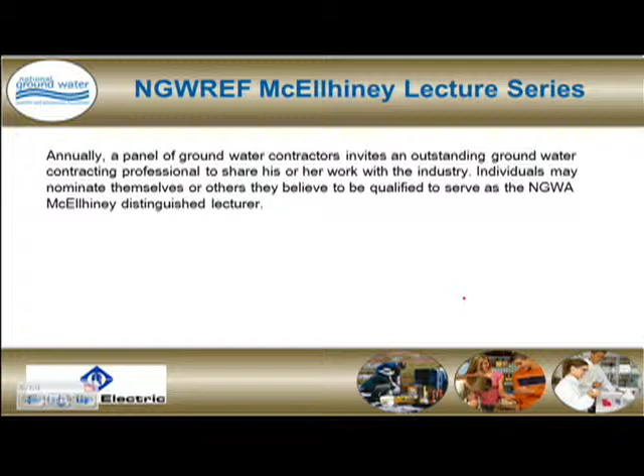I want to tell you a little bit about myself. My name is Tom Christofferson. I am the program manager for water well standards in the state of Nebraska, and since 1999 I've been involved with and an integral part of the Nebraska Grout Task Force Study. I was a water well contractor for over 20 years before I went to work for the state of Nebraska as a field superintendent and an inspector, and now I'm the program manager, so I have a wealth of knowledge about how wells are constructed and how wells are regulated.

Our series today is called the Nebraska Grout Task Force Research, appropriately titled Unexpected Results and New Solutions. This lecture series is about a research project that was different than any research project you've ever known. Most research projects start off with a hypothesis, a budget, and a well-formulated idea of where they want to end up. Well, this research didn't start out that way. This research was developed upon need, and need about new solutions for unexpected results. It's more of a story, so if you stay with me for the next hour and 15 minutes, I'm going to tell you a really neat story about what happened to me in my state.

I want to visit a little bit, for our folks joining us over the web, about Nebraska. You see where Nebraska is located, right in the heartland of the U.S. Some facts about Nebraska: us locals pronounce it Nebraska, not Nebraska, not Nebraska, but Nebraska. It comes from an Oto-Indian term meaning flat water.

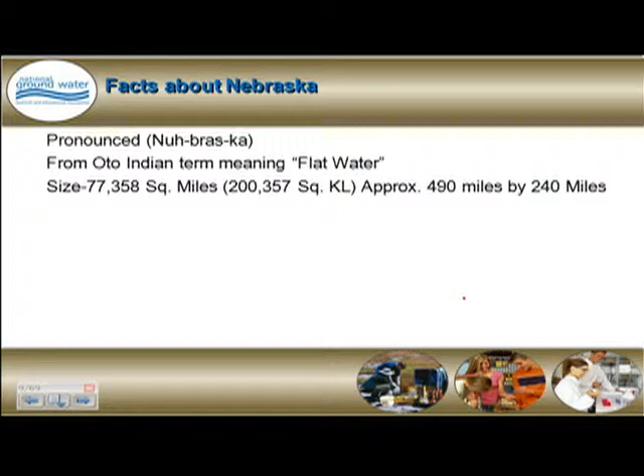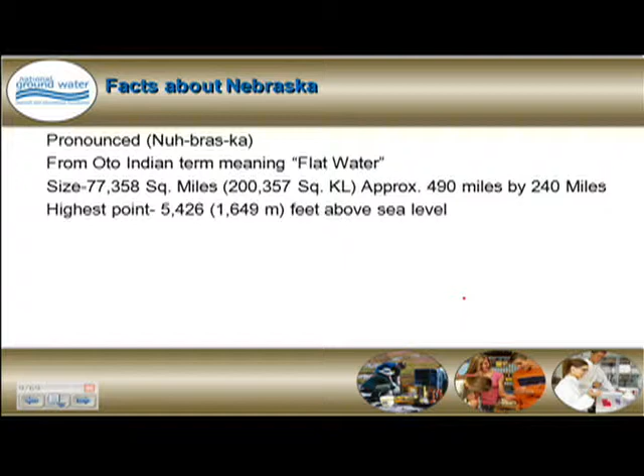Our size, I've been across the country and the world, so excuse me for that. The size of our state is pretty modest: we're 490 miles by 240 miles, about 200,000 square kilometers. Our highest point of elevation is about 5,400 feet above sea level, and our lowest point is 3,200 feet above sea level. So if you take that 2,000 feet of elevation and stretch it over 490 miles, you can see why the Oto Indians called it flat water. There's not much drop there.

Nebraska is known as a groundwater generator. For every gallon that flows into our state, 4 leave our state. That's because we're ideally located right in the middle of what the pioneers called the Great Inland Sea. Most of our deposits are sedimentary, and that allows us to create water, to store water. We are perfectly situated between the Rocky Mountains to the west and the Gulf of Mexico to the south. When the storms come over the mountains, the cold fronts are very dry, and they clash with this warm, moist air mass from the Gulf, and we get tremendous thunderstorms in our state, blizzards in the wintertime. So we get that precipitation in big amounts.

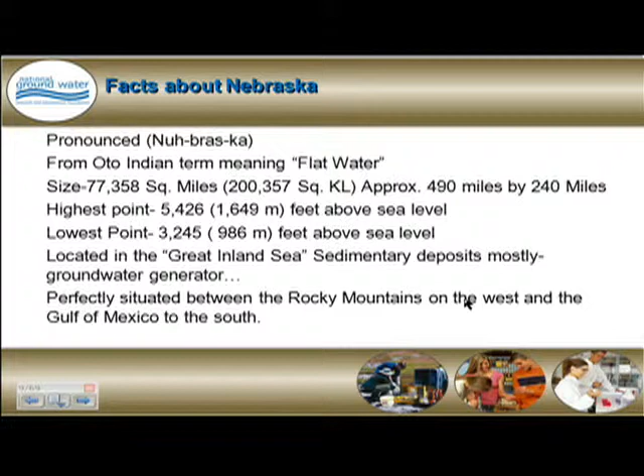Some more facts about Nebraska: we've got about 1.7 million people in our state.

1.2 million of those people rely on groundwater for their daily use. Two-thirds of our population is located in the eastern portion, or eastern quarter, of Nebraska, mostly in two counties: Lancaster and Douglas County.

Our economy is agriculture based. We have industry and manufacturing that supports that agriculture. We average $3.2 billion in income in our state. 40% of that comes from the sale of cattle and calves, 31% comes from growing corn to feed those cattle and calves and producing ethanol and other corn products, 14% comes from growing and selling soybeans, and 4.3% comes from the sale of hogs.

Our greatest natural resource is our groundwater. We don't have the forests, we don't have the mountains, we don't have the beautiful sceneries that I've seen across the country in other states, but we do have more groundwater than a lot of states combined. The USGS estimates that if we could bring our groundwater to the surface, we would have a lake surface larger than Lake Superior, Lake Michigan, and Lake Huron combined. It would be the biggest lake between the Great Lakes and the Great Salt Lake.

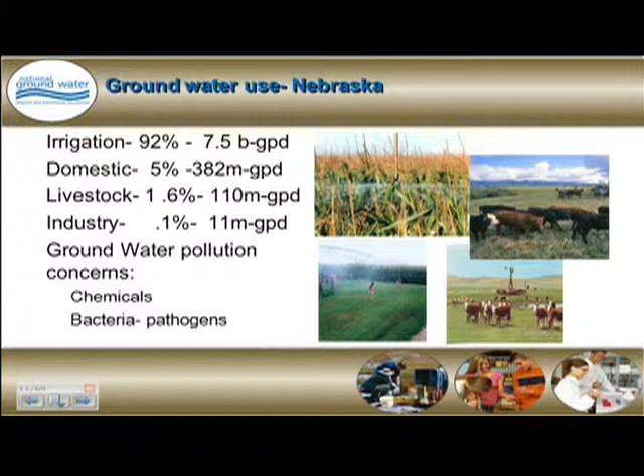Before 1986 in this state, to drill a water well, all you needed was a driver's license and a drill rig. There were no statewide standards, there was no licensing. So our legislature decided, in order to protect this great natural resource of ours, they passed the Water Well Standards and Contractors Licensing Act. The purpose of that act was to protect the groundwater, and another purpose was to promote the efficient usage of that groundwater.

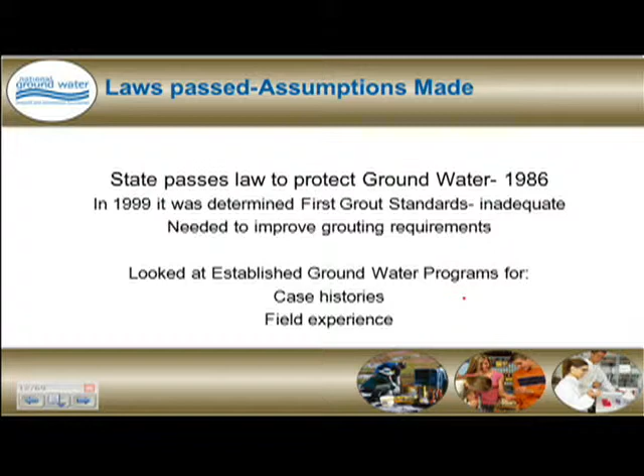In 1999, after we'd had standards for almost 11 years, we determined our first grout standard was pretty inadequate. Our first grout standard was a half a pound of bentonite per gallon of water. It was not sufficient in order to protect our groundwater. So we needed to improve our grouting and improve our requirements.

We looked at other states for case histories and field experience and what they did for protecting their groundwater. And what we found was, they told us, rely on this: full-length grout provides maximum protection of the groundwater. When in doubt, just grout your hole. And all grout materials are pretty much alike. What this did, folks, is it put us in a conventional thinking mode. We kind of locked our brains in a box.

And we took what other people told us for fact. We looked at the prevailing technologies for how grouts were studied prior to 1999, and found out that most of them were studied in laboratories. These were in controlled environments. There were some in situ studies that were done, but they were historically destructive, limited in their depth of view, and segmented.

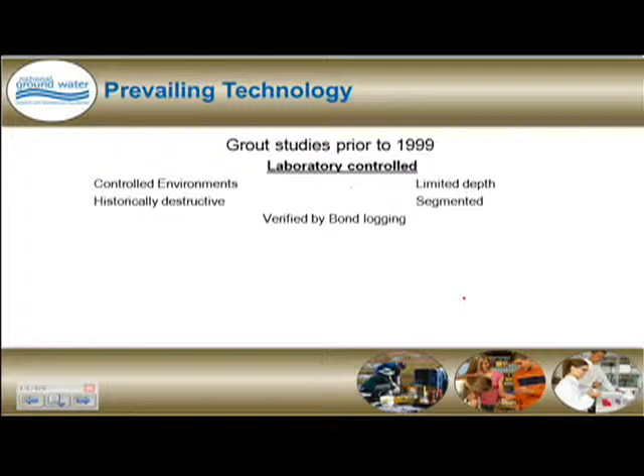What they used to verify their findings in these laboratory studies was a technique called bond logging - that's when they put an acoustic ping in the casing to see if there is any hollow portion behind that casing. If the grout was present, that ping would come back quickly. If the grout was absent, it took a longer time for that echo to come back. So that's how they verified their beliefs that all grout materials are alike, and that full-length grout provides maximum protection of the groundwater.

We were told that the two products we should look at were cement grouts and bentonite grouts. Cement grouts because they provide superior structural stability to the well casing of the borehole, and bentonite grouts because they're more flexible, more pliable, and in the sedimentary deposits, they will rehydrate. So we looked at these.

Cement grouts we found were considered a universal grout. You could use them in all kinds of applications. Water quality didn't affect them, ground quality didn't affect them. Their drawback was they had limited cracking, but it was mostly horizontal cracking, and it bonds to all types of materials. Anybody who's poured a sidewalk or mixed concrete knows that concrete sticks to their shovels, sticks to their wheelbarrows. It's really nasty stuff.

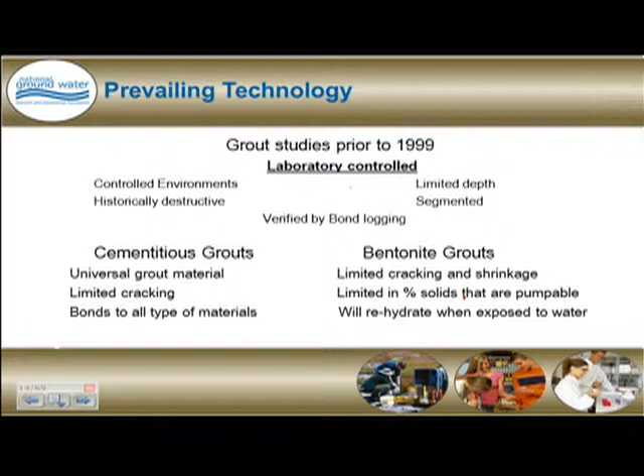The bentonite grouts, we were told, would also crack, but they were limited in that cracking and shrinkage. The big drawback was you could only pump about 20-25% active solids in a bentonite grout. But the redeeming factor was bentonites rehydrate when they get wet. That's what they do - they swell up and repair themselves.

Based on this conventional thinking, the state revised the standard in 1999, and we adopted the national belief. We took as the bentonite grout standard a 20% active solids bentonite. It had a permeability standard of 1 × 10⁻⁷ centimeters per second, and we felt pretty good about this. We now joined the rest of the country in providing groundwater protection.

Shortly after that, the bentonite industries came to us and said, we've put a lot of money and research into a grout product that's less than 20% solids. It has the same characteristics as a 20% solids product - same gel strength, same permeability standard - and now they can't use it in Nebraska.

So, with the bentonite industry's cooperation, the state of Nebraska decided to construct the ultimate well. This was going to be the way everybody should make wells. For the first time, we held a demonstration at the University of Nebraska. What you're seeing on the screen is the first time anywhere a water well has been filmed from the inside out during its construction.

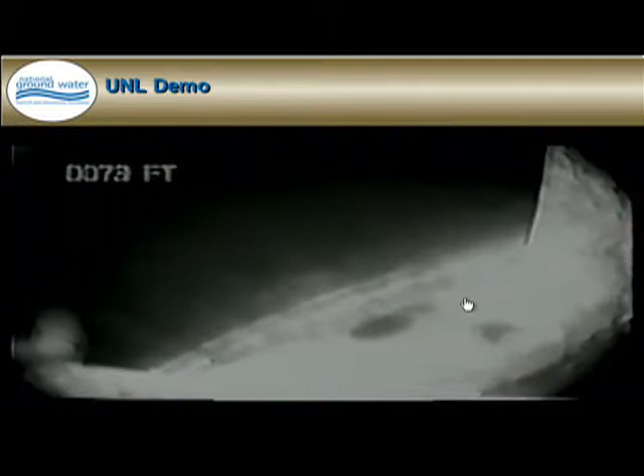They're a free fall chip. We poured them in a real deliberate fashion, and what we really wanted to see was how these chips form a seal, because this is a product we use a lot in Nebraska and have used a lot since 1986. We wanted to see if the chips would align themselves, if they would make a good seal, if they would bridge, if they would impact the gravel pack. As you can see, the chips kind of find their own place in the borehole. They align themselves in a real nice, orderly fashion, and they make a good, tight, homogeneous, uniform seal. We were really happy about this.

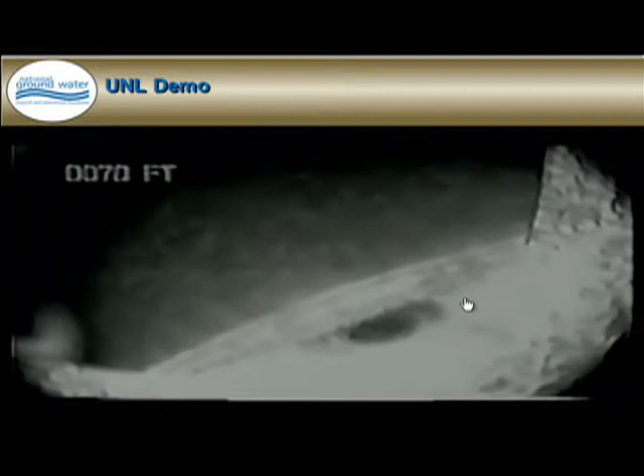This was really encouraging. So now we decided to start pumping our grout slurry. You can see our grout slurry coming up in a very quick manner, just like you want bentonite grouts to do. They come up the borehole in a rapid fashion, evacuating everything liquid out in front of them. You can see the grout itself has a nice kind of pudding consistency. It's looking really good - in fact, it came up the borehole so fast, it outpaced our camera.

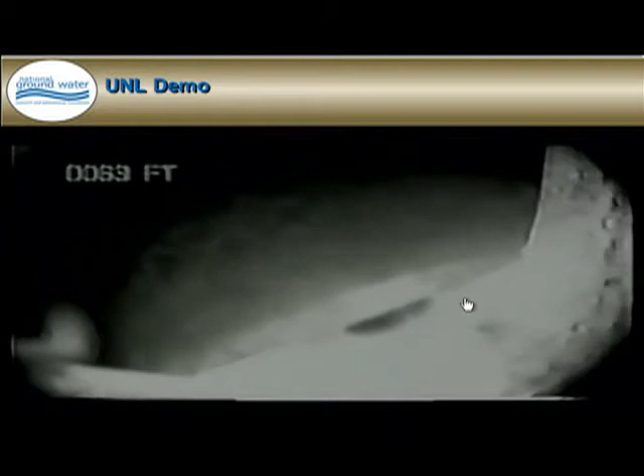Once we caught up with the top of the column, we watched how the grout migrated up the borehole. When the grout would meet an obstruction - say a piece of bentonite stuck to the side of the borehole wall, or some cuttings that didn't quite get cleaned out - the grout, instead of evacuating it, would just entomb it. It would surround it and place it, kind of making it part of the grout column.

This was the ultimate well, folks. This was how we make monitoring wells in Nebraska - full-length grout to provide maximum protection to the groundwater. We were very excited about this. Wow, look what we did.

Until we went back 14 months later to follow up on this. Most of that grout column was missing. It's gone. And this is how you get started in research.

The sun revolves around the Earth. That was a tough one to get people not to believe. The world is flat, Columbus, you go over there, you're going to fall off. And if man was meant to fly, God would have given him wings. I tell you what, if that would not have been true, I'd have had a lot of train miles and shoe leather worn out this year. Because I'm really glad folks would challenge the conventional thinking.

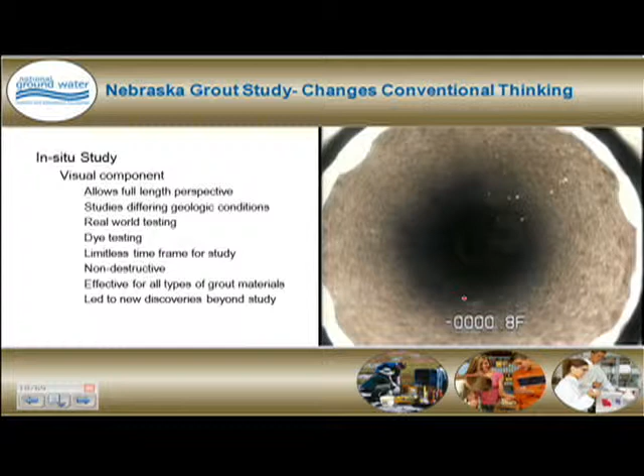But we can use it for all types of grout materials, and we can put it in all kinds of geologic sites, and it's effective for all kinds of grout materials. In fact, some of the findings out of this led to new discoveries beyond this study, and we'll talk a little bit more about that later on.

Early on, it was felt that our study needed a mission statement. The mission statement to keep us focused was that we are going to look at the products used for grouting wells, not the people who make the products. We're not comparing manufacturers, we're comparing bentonites, certain grades of bentonites, certain degrees of cements, and we want to study the properties and how these react.

Because of that, we got great cooperation from the industry. The bentonite industries and cement industries gave us all the information and the support we needed.

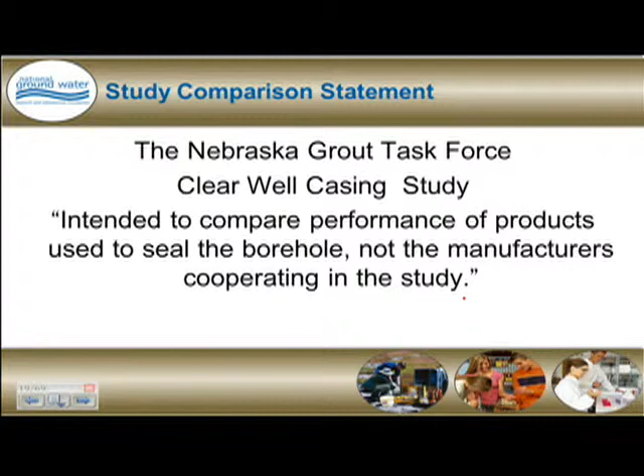One thing we learned: when we made our ultimate well at UNL, we didn't do any background testing because it wasn't research, it was a demonstration of the ultimate well. So when things went bad, we found out that we didn't do anything for testing the groundwater. Were there contaminants? Were there conditions that would affect grouts? We didn't know.

So when we chose our study sites in our state, our university went out and took core samples of the soils. We studied those for particle size, moisture content, and any contaminants that would degrade a grout. We also studied the water quality for those contaminants and those parameters.

Then when we were done with that boring, we put a monitoring well in that site, and we would monitor the fluctuations of the static water table. What increases or decreases in water table affect our grouts? This is what we're going to find out.

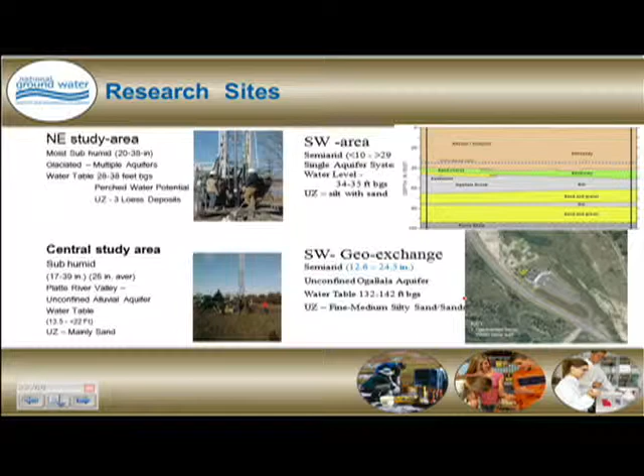They were held to that because of the cost of the casing. The casing was about $10 to $11 per foot, so we had expenses we had to stay in tact with. The fourth feature of the southwest area is where we got into looking at grouts for our geosystems.

This is at Lake McConaughy, the visitor center. This unique situation gave us a very deep water table. We had an extended vadose zone, so we could see how our grout stands up to this dry environment without much water. To give you an example, this is how monitoring wells are constructed in Nebraska.

One thing we learned in the university study is when we wanted to find out how badly the grout was cracked, we tried to pour dye down the hole, but the dye went everywhere. So our task force came up with a containment vessel that we designed about a 4-foot deep flush buried cover.

In the bottom of that cover we poured about a foot of gravel, and our dye tube terminated in that gravel. So when we dye tested this, the dye would load the gravel and put an equalized pressure on top of the grout column, so we would get a uniform standard for validating our grouts.

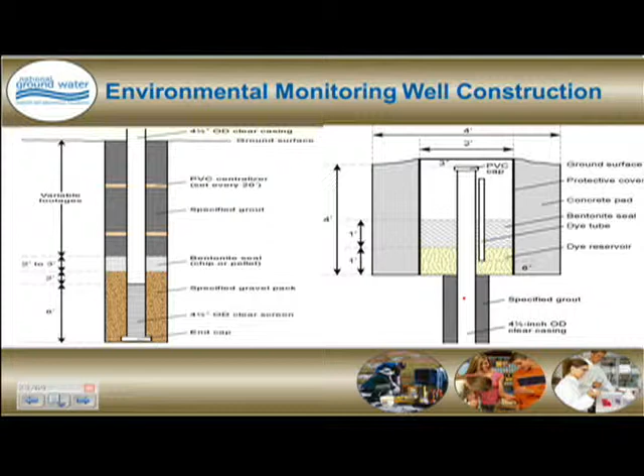The goal of this visual study was to be a very objective analysis, so we went foot by foot of the borehole. Our camera surveys were performed 24 hours after the grout was placed, so we got a new picture. We came back 30 days later, 60 days later, 90 days later, so we got a nice time-lapse photography on how all this grout ages.

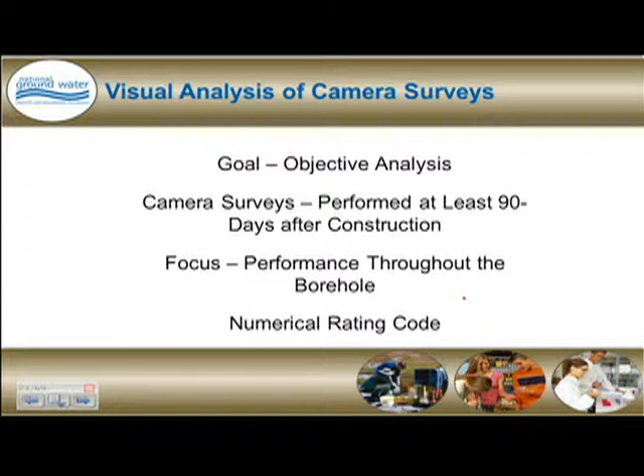If you have a 1, that means your grout was very good — it looked just like it was pumped the day it was made. If it was given a 2, we saw some cracks, some developments happening in the grout, but we still felt pretty good about its ability to perform. If you saw a 3, that meant the grout was no longer considered a grout — it had channels, voids, detachments.

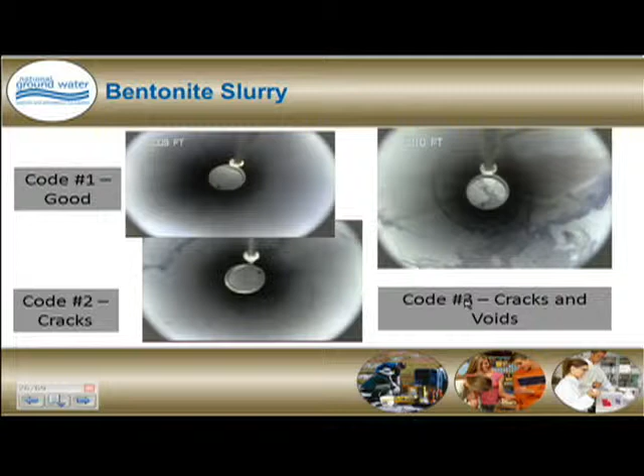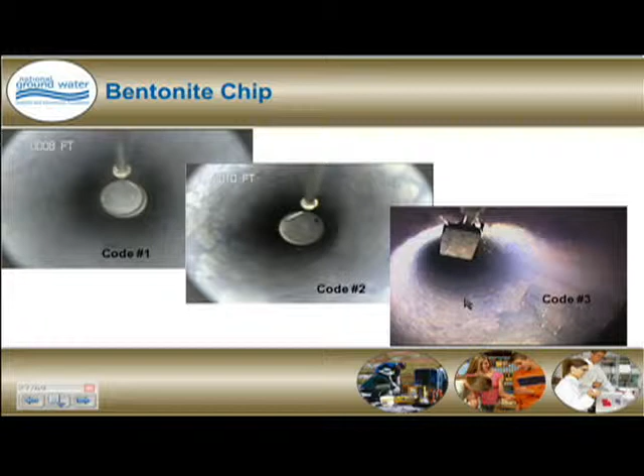Now, our next challenge, when we went to study the geo-exchange system for closed loops, nobody makes closed loop piping that's clear, and it's never big enough to put a camera in. So in order to study the grout, we had to insert a clear sight glass right in the middle of our loops. This did two things: it allowed us to look at the grout full length, and it also allowed us to look at a grout in a larger than normal situation of a borehole. We had to drill almost a 10.5 inch borehole for 3/4 inch loops, and nobody does that in the real world. So we're looking at an overgrouting situation and how that would affect our grouts.

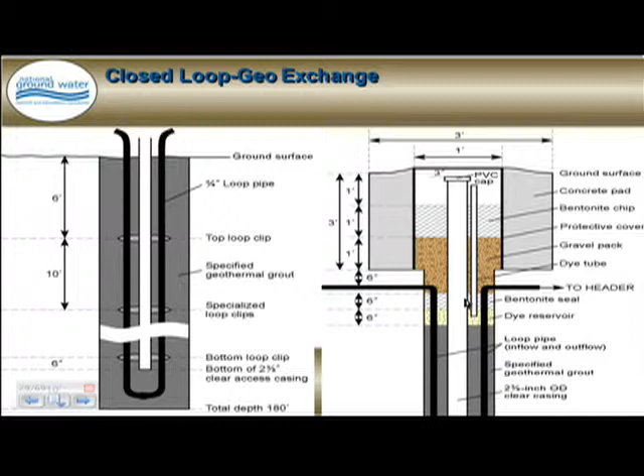When we did, our contractors told us that our loops are no longer working, and it's because that grout is insulating the loops. Well, getting caught in the conventional thinking, everybody was pretty sure that's what was happening until we came up with this picture. It's not the grout that insulated the loops, it's the lack of grout that insulated the loops.

And we found a family of bugs living in it. My good friend Ron Peterson from the bentonite industry looked at this and said, this is conclusive evidence that bentonite is not harmful to wildlife. So he's trying to make a good point, trying to put a good spin on a bad situation, but really, if there's bugs living in your borehole 104 feet below ground, you have no chance of providing groundwater protection with that kind of grout material.

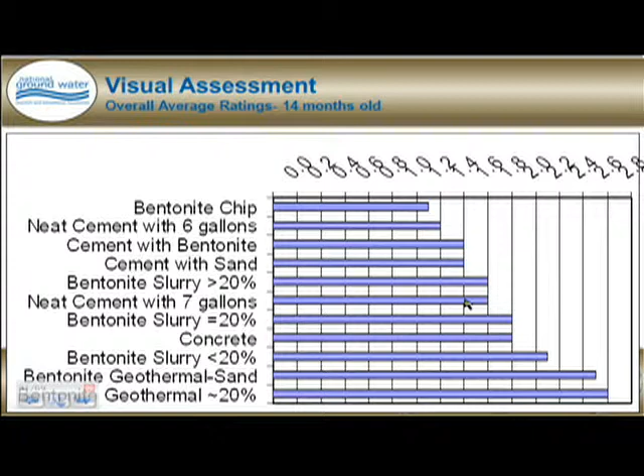So we are seeing some things here. We're eliminating some things. We're coming to some preliminary conclusions, but we need to validate it. Because ours is a visual study and bond logging is not going to work to validate our process, we chose the dye testing. The dye will show you where your cracks in your grout lead.

We asked the state of Ohio, who's been doing dye testing for 20 years or so, what to use, and they said use a green colored dye. Green is not a natural color for groundwater - if you've got green in the groundwater, it's pretty bad. There are other dyes that are oranges and browns and reds, and they could be confused with iron deposits. So we chose a fluorescent green dye.

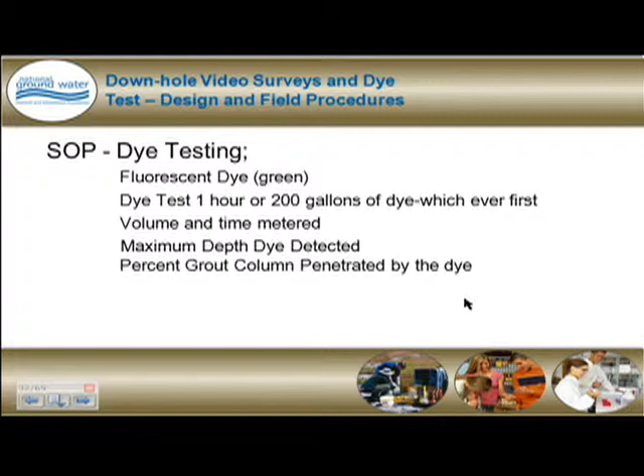Our procedure was to dye test these wells for an hour or until our dye tank ran dry. We had 200 gallons of dye mixed up, whichever came first. We would meter the volume used and the time it took for that dye tank to run out. That allowed us to calculate the proposed maximum depth the dye could be detected - how far it would really travel in a certain period of time, and how much percentage of the grout column would be penetrated by that dye.

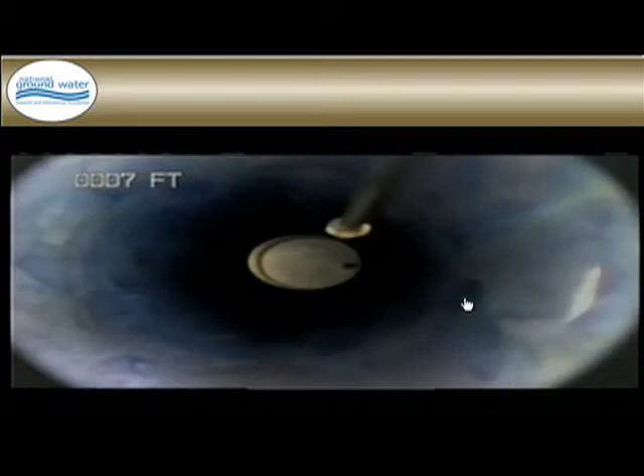This is how we construct monitoring wells for cleaning up groundwater at the time. This was maximum grouting, providing maximum protection, full-length grout.

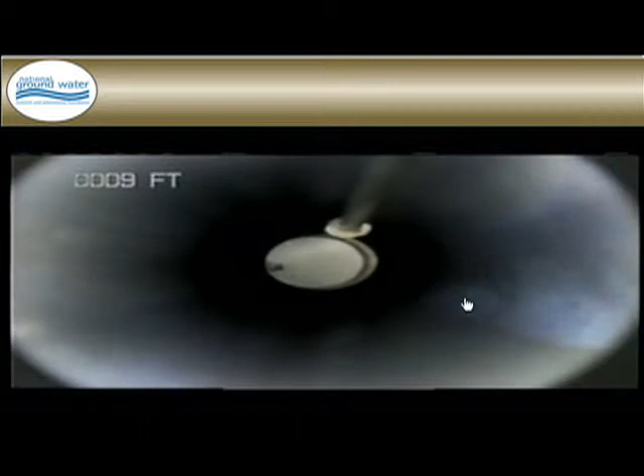Well, we watched this to about 9 feet, and we got pretty shocked, but now we're starting to see some ponding coming up in the borehole. And we're feeling, hey, maybe our grout column is intact at the bottom. We kept watching, but what happened was that wasn't ponding - the dye ran so fast it took the gravel out of the flush mount and took it down the borehole and bridged.

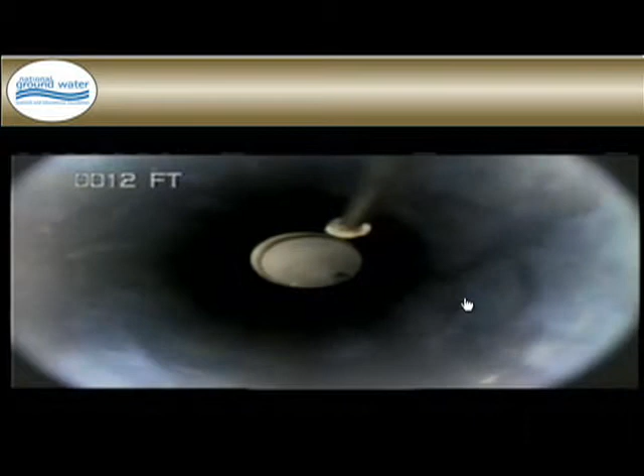That's how big the cracks were in this 20% grout. So we kept watching, hoping, and it kept looking pretty dim until we get down here pretty close to the static water table, and we do actually see ponding take effect. We do see some good news, folks. Why do I say that? Because if we don't see ponding, we know that the grout column is shot clear to the aquifer.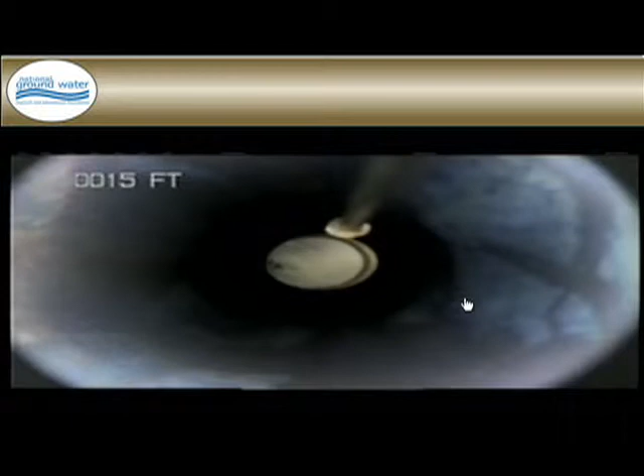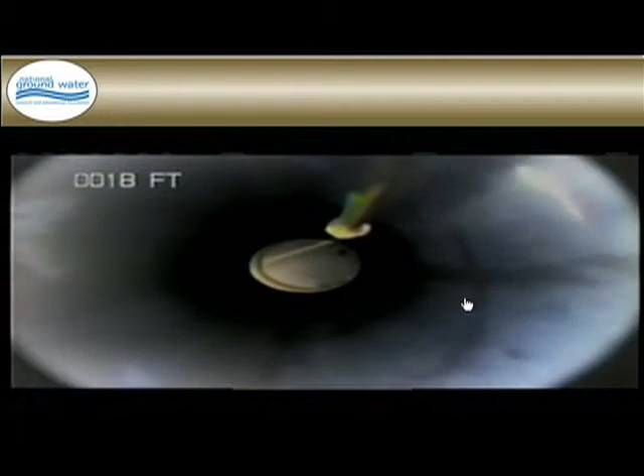This dye would have gone out in the aquifer. We would have never got any trace of it back. But when you see ponding taking effect, you know something's happening in the bottom that's holding that column from getting to our production zone. And if you watch the screen on the left-hand side, you'll start to see the borehole fill. So this gives us another clue - not the entire length of the borehole is damaged.

Here's another unexpected result. The screen on the left is a snapshot from that video. We get to 18 feet and see this nicely illustrated crack. Look at that green dye - that's pretty easy to see right there.

So we took a picture. We came back a week later - there's that green dye in that crack. Came back a month later - same green dye, same crack. We came back 3 months later - same green dye, same crack. This is where we learned that bentonite slurries will not rehydrate. Once they're cracked, they're cracked. They're not coming back.

Now that's different from what we were told. We were told bentonites have this absorbent quality - they get wet, they want to rehydrate and reswell. It's undetermined why this happens. It may be because in order to mix a grout slurry you have to have shearing action to drive the water into the particle. Then maybe there are retardants built into the grout that keep it from flashing in the grouter. But for whatever reason, if a bentonite slurry cracks, it cracks and is not coming back.

A new unexpected result.

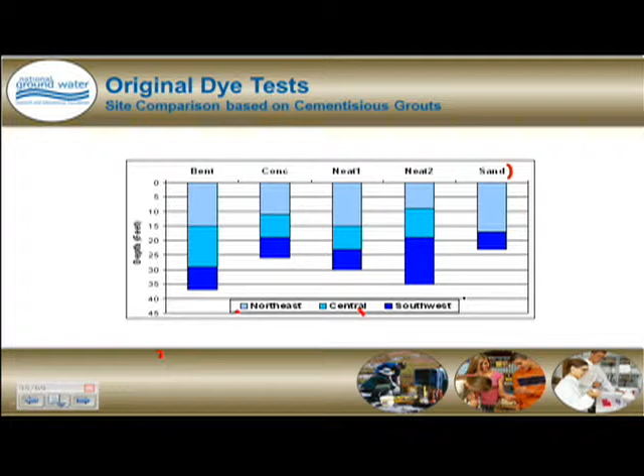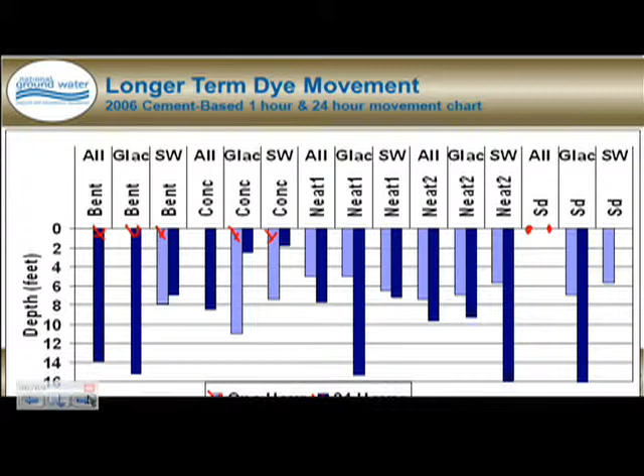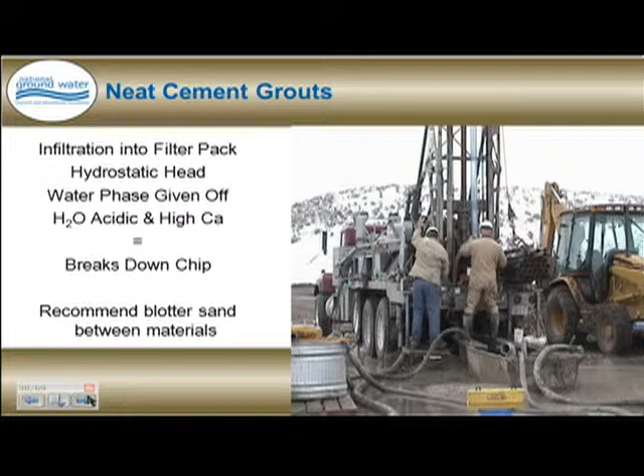Our third unexpected result is we found out that neat cements will blow right through a bentonite chip seal. This is another way we make monitoring wells. If you put a chip seal down like we saw in the video, right above your gravel pack, and then your grout column is neat cement, this neat cement has enough weight and enough characteristics that it divides the bentonite chips and gets right down into the production zone. To illustrate that, here's another video.

Now in the middle of your screen, you see the white chips as they were placed. These chips were given about 45 minutes to an hour to hydrate before we put any grout column on top of them. Now 45 minutes to an hour is probably not enough time to fully hydrate a chip, but there are conditions in Nebraska where you can't leave the borehole open much longer than that or it becomes unstable.

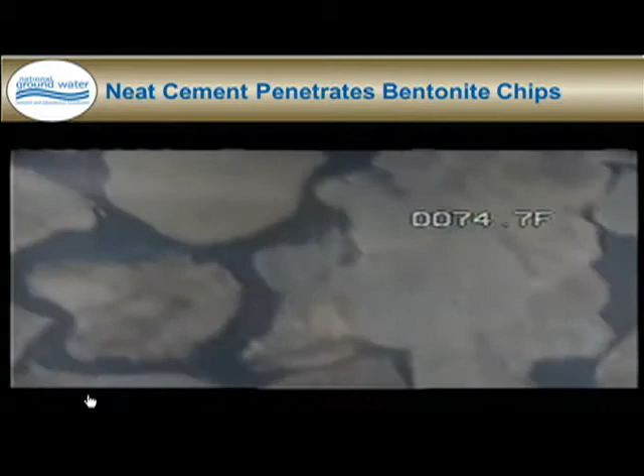So we went ahead and put our grout column in there, and you see the black lines in between those white chips, that's neat cement. You see how the neat cement has just divided the chips and forced its way and intruded right through a partially hydrated bentonite chip seal. Not only did it do that, it kept migrating right down into the gravel pack.

You see the gray matter in between the grains of sand? That's our neat cement. And if you keep watching it, you see the cement cracks. So now we have a product that's designed to protect the groundwater, full-length grout, that has penetrated our primary seal, gone down into the production zone, and cracked. We have a pathway.

What we're recommending is we have to protect those chips with a real fine blotter sand, so that keeps that neat cement away from the bentonite, and we won't have that chemical reaction between sodium and calcium. Slow that column down and let it solidify before it gets into our production zone.

So grout compositions. Remember that grout that was just as good as the rest of them? Well, it was. That less than 20% was just as good as a 20% or a 30%. Problem is, none of them performed worth a darn. The 16% grout cracked quicker. Took the 30% grout a little longer to crack, but they still ended up in the same position.

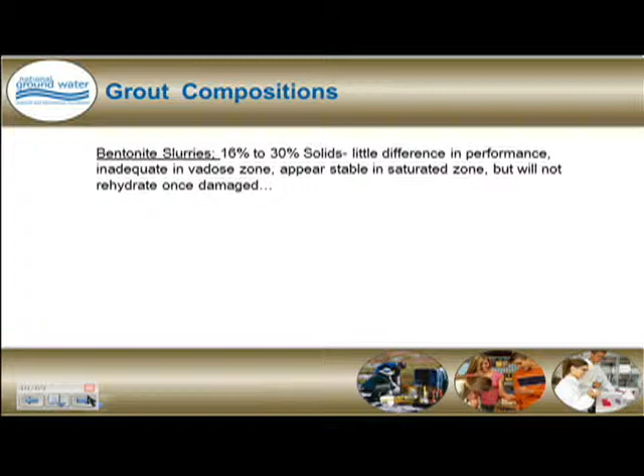Pure bentonite solids as a slurry will not rehydrate when they're damaged. They are inadequate in the vadose zone because of the wicking effect. The vadose zone has a dynamic of it's always pulling for water. And if it pulls water out of, let's say, a 20% bentonite, 80% water slurry, you've got 80% open area. And that dynamic goes on 24 hours a day, 7 days a week, forever. So a bentonite slurry in that unsaturated zone is not going to provide the protection we're looking for.

Now the bentonite chips, here's another unexpected result. The bentonite chips do crack, but we discovered they do rehydrate. They're a raw bentonite product, over 65 to 70% reactive solids in the bentonite chip. At that Grand Island site where we had high fluctuations of groundwater, we saw at the end of the irrigation season that the grout of the bentonite chips would pull apart. And by springtime, when the water table came back up, they'd come back together. We saw that very consistently for 8 years. It never left that dynamic.

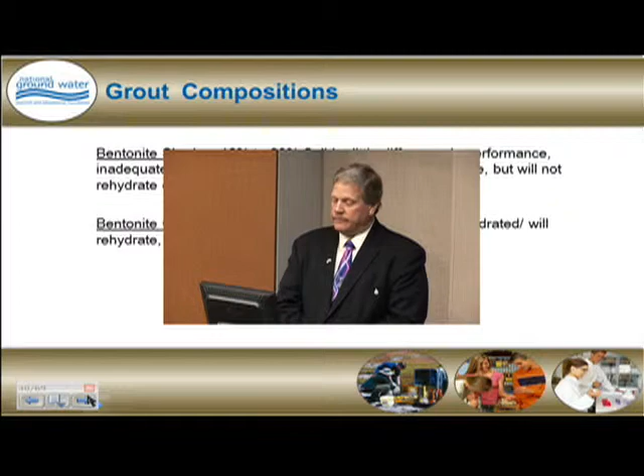So we feel really great about the possibility of a bentonite chip rehydrating and providing that maximum protection. But they're time consuming to put in the borehole, take a long time to place, and they can be very difficult if the borehole's not big enough.

The cement-based grouts. We really like cement-based grouts for structural stability. A cement may crack on you, but it won't leave. If a bentonite cracks and you have that 80% void space, it's gone. A cement stays solid in the borehole, it's where you left it. So we like it for structural stability on the top of the borehole. It solidifies the casing, it prevents the casing from cracking if it's impacted at the surface, but we also discovered that cements do not bond to PVC, which is something else the industry didn't expect. We'll talk about that in a later slide.

So what do these results really tell us? What they tell us is portions of the borehole are adequately protected, portions of the borehole are not adequately protected. Things are different than what the industry really thought.

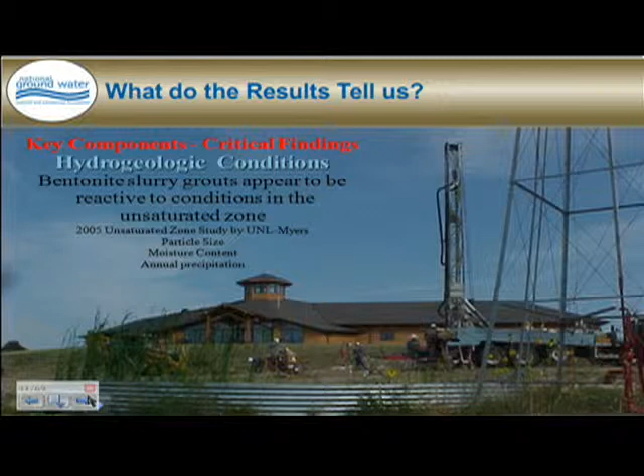So in 2005, the task force asked the University of Nebraska to study this, just the unsaturated zone. A man named Will Myers for the University of Nebraska determined that the biggest components that affect grouts are the particle size of the unsaturated zone and what makes up that particle. If it's a grain of sand or if it's a grain of silt, it's a totally different dynamic. The sand doesn't absorb anything, but the silt will. And the moisture content of that vadose zone, annual precipitation, plays a real big role in that.

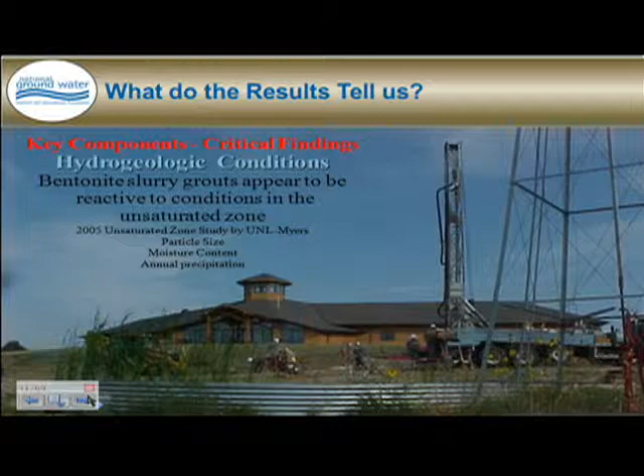If the unsaturated zone is constantly dried out like we have out west, and it's a silt and a clay, that's a super absorbent material, and it's disastrous to a high water slurry. If it's a clay that's in the northeast, a real tight clay that gets a lot of moisture, you have a little bit better result for a high water slurry.

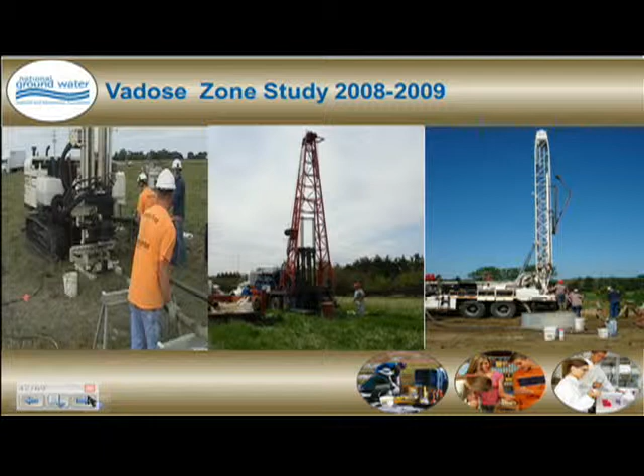So now we've narrowed our focus. If we want to provide maximum protection to the groundwater, we've got to focus from the groundwater table up and find out just what's going on for that dynamic. So that leads us into the vadose zone study of 2008 and 2009.

Now what's different about the vadose zone study? Well, a couple things. We're just looking at the water table to the surface, and now we're looking at different methods of construction. The grout study was based on mud rotary, because we're a mud rotary state. That's how our wells are drilled.

But because we're having such a challenge with our environmental wells, we decided to look at hollow stem augers and direct push. This is technology used for constructing, monitoring, and cleanup wells. So we have different methods, and now we're looking for different recipes.

We began planning this in 2007, and we came up with 4 parameters we have to match for the vadose zone study. We'd have to find materials that would resist cracking, be easily placed, be economical, and readily available. If you can't match all 4 of these, it's not going to work for us.

Early on, we determined we could find materials that would resist cracking. That's not the problem. The problem is we couldn't afford them, we couldn't get them, and nobody had the equipment to place them. So we had to find materials in our state for our contractors that would match all 4 of these parameters. The state had 3 designs they wanted to look at.

Our environmental folks had 4 designs. They were really concerned about their industry. Our partners in this from the bentonite industry were Wyo-Ben, Cetco, and Baroid. Each had 3 recipes to look at. The direct push folks had 2, for a total of 18 wells per site.

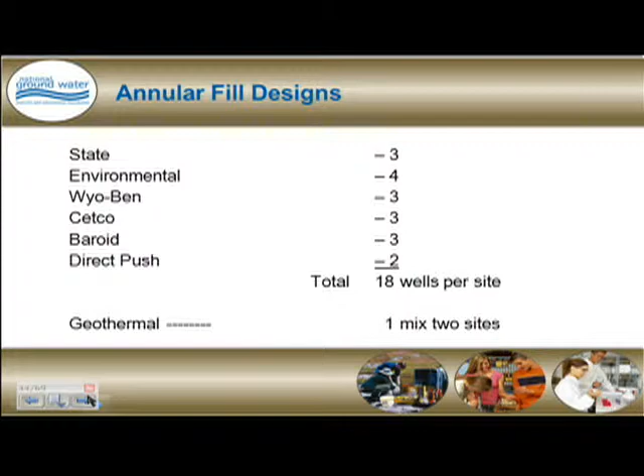And then, as a concern for our geothermal contractors, GeoExchange, we went back to 2 sites in the southwest and northeast area of the state. We went back and looked at gravel packing these loops and putting chips around the top for 2 reasons. We already had wells constructed like this, and we had to study this to see if we had potential problems in the future.

And second, we had to see why these sand-packed wells performed a lot better than the geothermal grout wells that were grouted to the surface. So, the mixes the state wanted to look at.

Mix number 1 is a recipe we got from the state of Kansas. This came right out of their oil patch, and it was basically a cement bentonite with a lot of high solids in it: 100 pounds of sand for a bag of cement and 5 pounds of bentonite.

The next thing our contractors wanted us to look at was drill cuttings. They said, hey, put back the material from the borehole you took out. If you're trying to match things, it's got to be a natural match. So we did. We studied drill cuttings.

Then the third thing we were really concerned about was our standard for constructing domestic wells in Nebraska. This is where we would gravel pack to within 10 feet of the surface and top it off with a chip seal. We had to see if those grouts were performing adequately to protect our citizens.

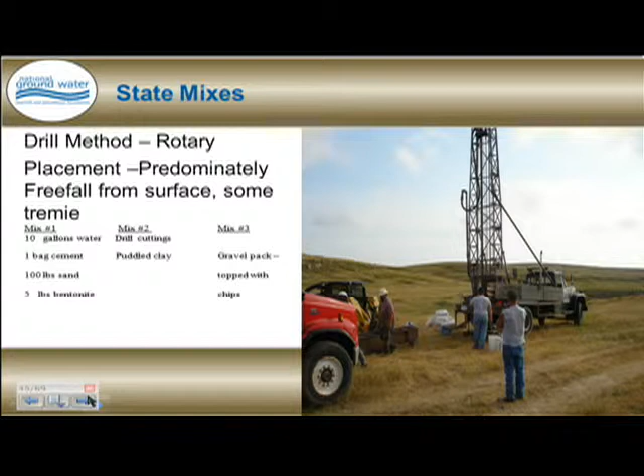The environmental folks, they had the answers. They said, Tom, mix number 1, mix number 2, that's going to do it. We studied it. We had great success over the years.

We really like this. But in order to find something else, just in case, they came up with a really high solids slurry of 450 pounds of sand for 1 50-pound bag of bentonite. That's a 9-to-1 ratio. That's really high solids.

And then they came up with a dry mixture. They're going to mix 3 parts of sand with 1 part of bentonite, trying to match the grain sizes. The granular bentonite is about the same size as masonry sand.

Wyo-Ben looked at a really, really high bentonite content for its cement. They put a bag of bentonite with a bag of cement to see if that would reduce the heat of hydration and the cracking. They also went with a 400-pound high solids slurry bentonite.

And their dry mix, they went with 1 part chip, 1 part pea gravel, once again trying to match the sizes. The pea gravel is an inert solid. There's no reactivity to it. It's going to stay at the same condition it was originally created. The 1 part chip we liked because it was that dynamic, it would rehydrate.

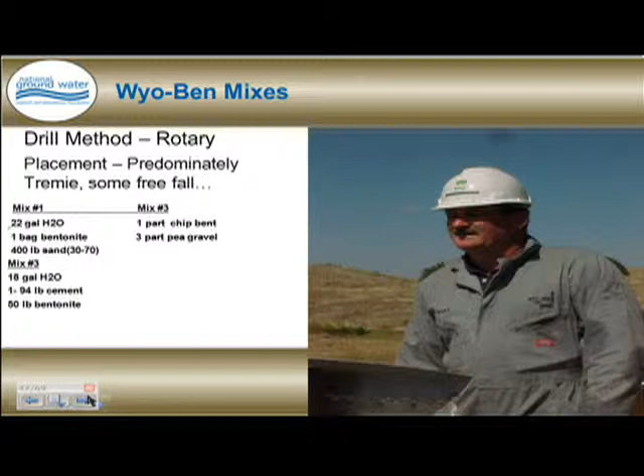So we're going to see if we can create a high solids dry slurry.

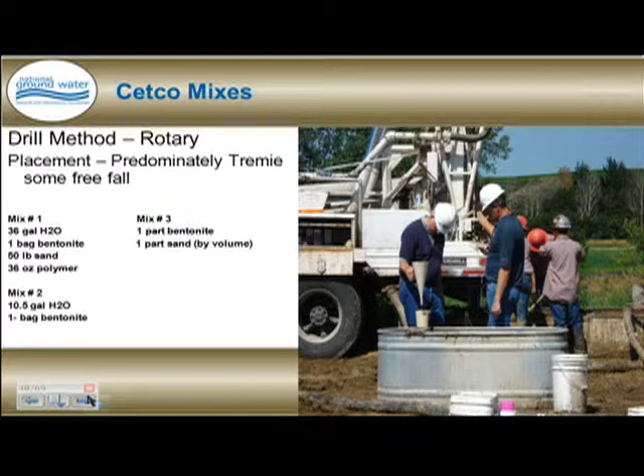Cetco went with a real high water content bentonite. They only put a 1-to-1 ratio of sand to bentonite, and they added a lot of polymer, seeing if the polymer would help the bentonite grouts. Then they really cut the water down, and they put in 1 bag of bentonite to 10 gallons of water. Their dry mix, they went by volume: a 5-gallon bucket full of sand, a 5-gallon bucket full of bentonite, a 1-to-1 ratio.

Baroid is a division of Halliburton. Halliburton's a major cement grouting manufacturer, so they focused on cements, trying to solve our cement issues. And what they did, they really cut down the water content—bare minimum water, 5.2 gallons for a bag of cement. And then they put in some of their IDP product that would retard shrinkage and reduce cracking, and then they added one that just has a pozzolanic additive, kind of a fly ash component. Their dry mix was a 1-to-1 ratio, only it was by weight: 50 pounds of sand to 50 pounds of granular bentonite.

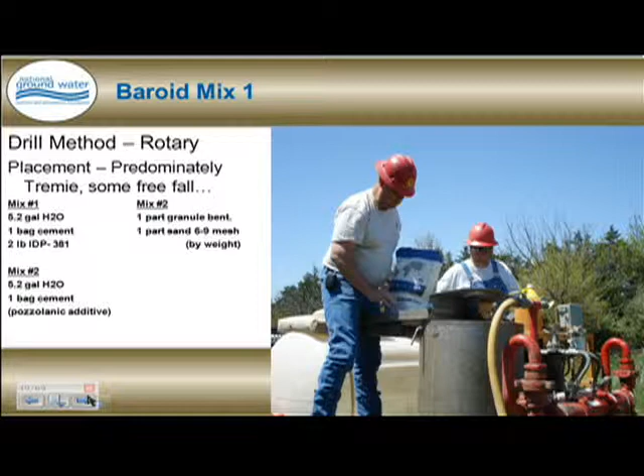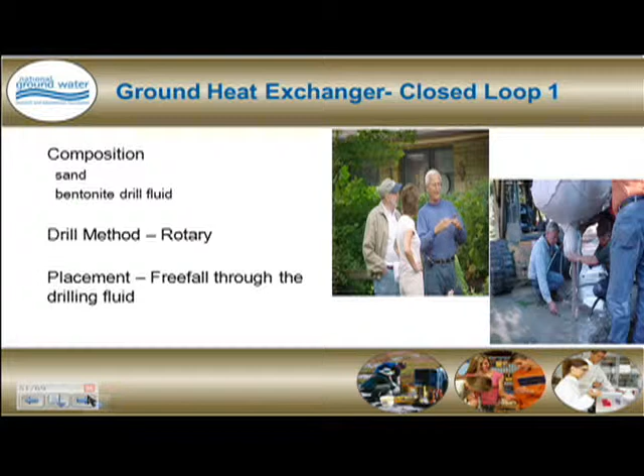The ground heat exchanger, we went back to what we did in 1999. You're seeing the picture on the lower right, where we're just free-falling sand through a kind of bentonite drill fluid. We're trying to recreate a dirty sand, is what we're doing here. And this took a really long time to gravel pack this loop, but it's replicating what the standard was in Nebraska before full-length grout.

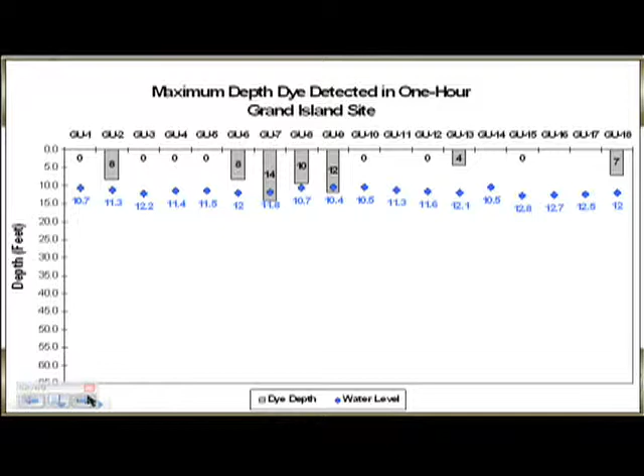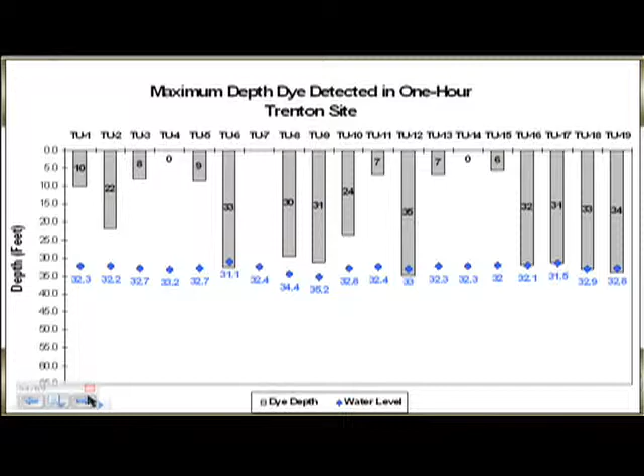We had a little left, and then we went to Trenton. We had 6 of them hit groundwater in an hour, 3 more over 70%. But we still had a couple of them that were hanging in there. So we're down to maybe 4 or 5 recipes that we felt really good about in the vadose zone.

Remember the environmental folks? Okay, here they are. Here's their results. Guess which 2 were the 2 they thought would be the answer? That's the bentonite polymers and the bentonite catalysts. And we got 58% and 67% of the grout column compromised in an hour.

They were high water content slurries once again. If you look on the left-hand side of the chart, their 9-to-1 sand to bentonite ratio gave 24%—and this is an average of all 3 sites. So that's acceptable, but hey, clear over to the left, their dry mix gave 3%. They matched a dry borehole with a dry mix, and only 3% of the grout column was compromised. We have found that high solids content in an environmental well, which is mostly all vadose zone, is the only way to protect that groundwater.

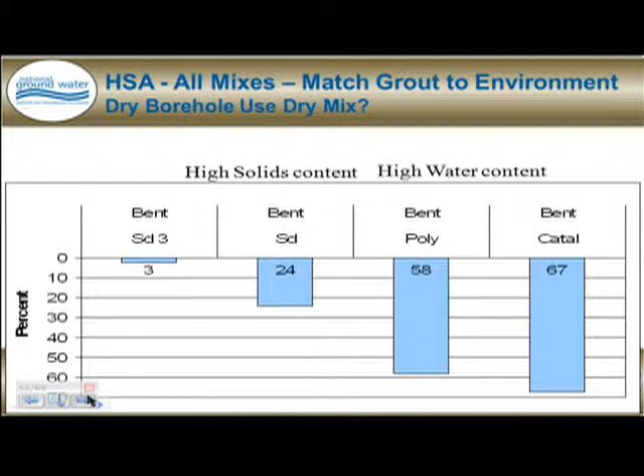A high water slurry is not going to be effective. The direct push, folks, it really didn't matter much if you treated the bentonite with soda ash or you didn't—that's statistically insignificant when you look at over 80% of the grout column compromised in an hour. And the problem with the direct push is they just can't get a big enough annular space to get enough solids in there to protect the borehole.

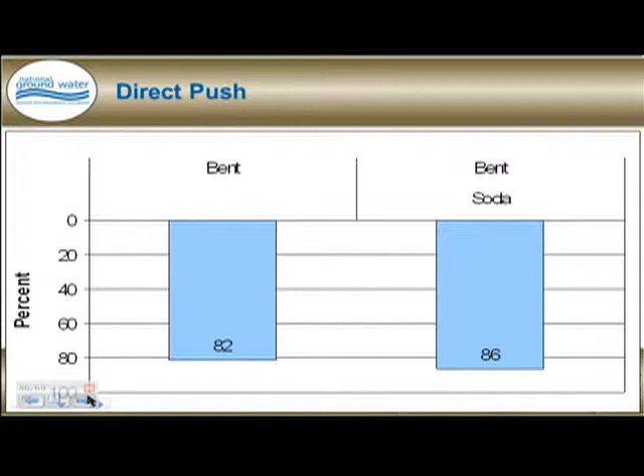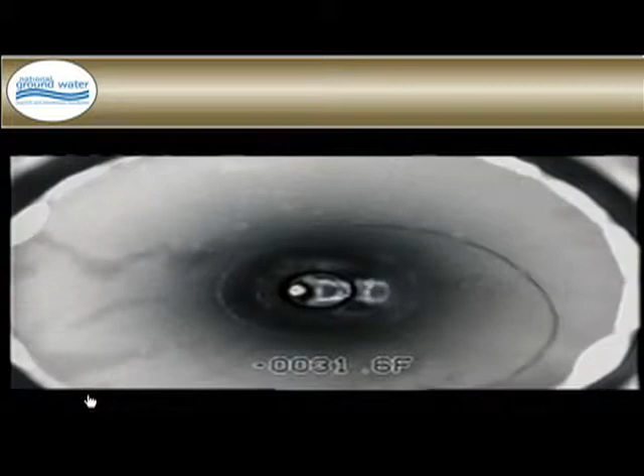To show you that, this is a video of a monitoring well installed by direct push methods. We're going down a 2-inch monitoring well. You already see the dye penetrated in front of us. We're coming to the static water table, and this is the only time in the study we saw a bentonite crack below the static water table. In fact, not only did it crack below static water table, it allowed dye to penetrate below the static water table.

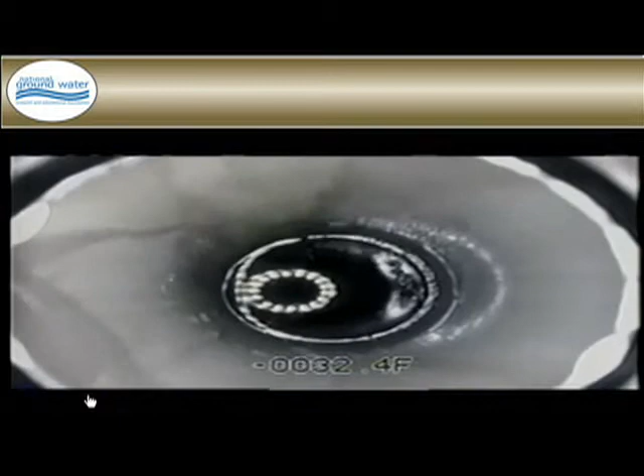Now, to be fair, this is a semi-confined aquifer where once you penetrate the production zone, the water table rises up into the clays and soils. But when we compared this with all the other wells on site that had a large enough annular space, we never saw the cracking and never saw dye penetration. So the logical conclusion is there's just not enough solids in this borehole to provide protection.

Now I want to say a word about direct push. Direct push is a fantastic technology for what it's designed for—it'll give you a biopsy of an aquifer and delineate a plume quickly and cheaply. It's designed for investigations. Trying to make a permanent situation out of an investigative tool is not going to be effective here in Nebraska. I'm sure the folks behind this technology will adapt—by participating in the study they found out where they need to get better, and I'm sure they will. But for now, direct push is used as a temporary well in Nebraska.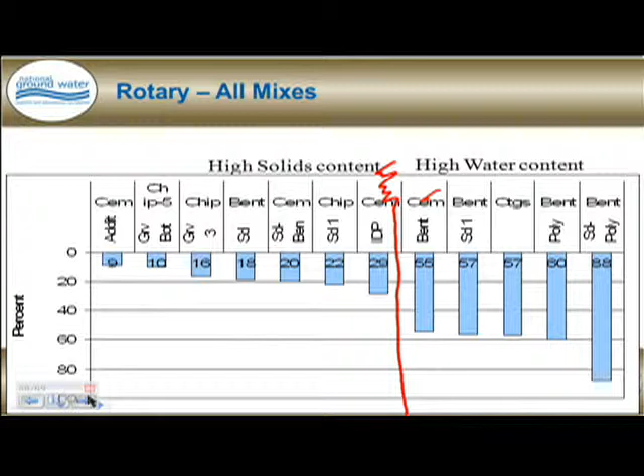Rotary mixes—okay, this is all the rest of them. This is really interesting. Let's go over to the chart again. If you stand back and look at it, you'll see dramatic differences right here. Anything on this side of the chart, when you look at it, is a high water content—a high water slurry. And look at the results: over 50% is compromised.

And hey, look here—drill cuttings. How can that be? This is the same material that came out of the borehole. How come we got 57% compromise off the same material? Well, after looking at this, we concluded that while it's the same material, we cannot replicate the compaction that this material is placed in. In other words, when you drill it up, you destroy the compaction, and when you destroy the compaction, you destroy the sealing capabilities. That's why we don't allow drill cuttings as a grout in the state of Nebraska.

But let's go over to this chart. This is how we construct domestic wells in the state of Nebraska. I felt really great about that—only 10% of that column was compromised. So we know our drinking water wells were pretty well protected. Here's the cement with a fly ash additive, 9%. These two are almost identical.

Here's our gravel, 3 parts gravel with 1 part chip. Here's our sand with bentonite, volume to volume ratio. Here's a sand with cement bentonite—this is high solids—1 part sand to chip. And here's the IDP with cement. So with high solids contents, we got less than 30% penetration of the vadose zone.

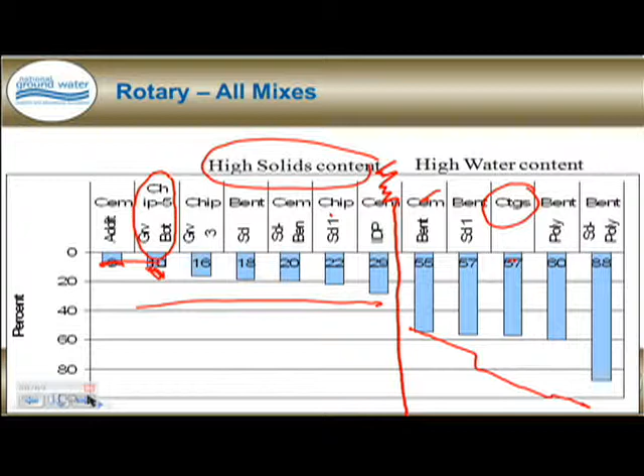If you didn't have a visual component, you wouldn't know about a microannulus, and this is where we learned that cements don't bond to PVC. During the heat of hydration, the cement gets hot and softens the plastic. When the cement cures and dries, it recedes and draws back, and the plastic goes back to its nominal size. It creates a microannulus not much thicker than a sheet of paper. But without that bonding, we don't have a seal between our grout and our casing—though we've got great structural stability.

So cement really does not bond to all materials like we were told. It really is not the universal grout material like we thought it was. It has some fantastic universal properties, but now we know there are truths and myths about both cements and bentonites.

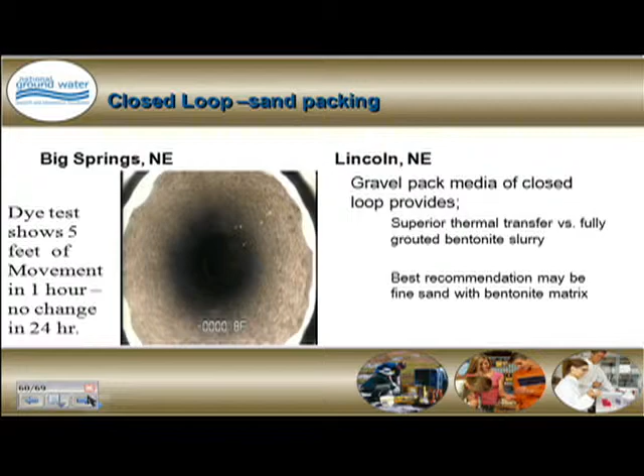But I want to give you some really exciting good news. For our geosystems, our geoloops, the dirty sand experiment worked really well. The dye test showed we only had dye movement of about 5 feet in an hour and no change in 24 hours in that dirty sand. When we went back 30 days later, no change. 90 days later, no change. And it provides superior thermal transfer because we have full contact with the loops. We've now solved a problem for our environmental folks, and we've solved a problem for our geothermal folks. The only thing left to decide is how to come up with an effective way to place this sand so it's easily placed, meeting our 4th parameter. And I think we've done that.

So this gets us into the unconventional thinking new results portion of the program.

Dave Hansen is a past McEllhiney lecturer. He's the owner of Design Water Technologies. As part of our task force, when we first started this, he told me, Tom, I don't think you can seal the borehole in Nebraska. I said, Dave, you're crazy. Of course we can seal the borehole in Nebraska. We do it all the time. We'd be in big trouble if we couldn't seal the borehole in Nebraska.

Well, I studied all the videos. I looked at every one of them, over 8 to 9 years, 128 wells, foot by foot. It really pained me to say this for the first time, because he was sitting in the audience, but he's right. We cannot seal the borehole in Nebraska.

You know why we can't seal it? Because the ground we're drilling in isn't sealable. If it was, we wouldn't have groundwater. If we could seal it, we wouldn't be a groundwater generator. Our state was designed to collect and store groundwater. That's what it does, that's what the unsaturated zone does. And if you put a high water slurry in that filtration system, it's going to take the water out of it and store it. That's what the design is.

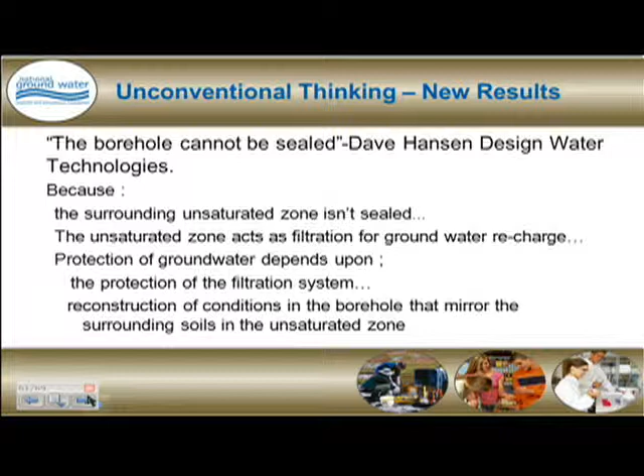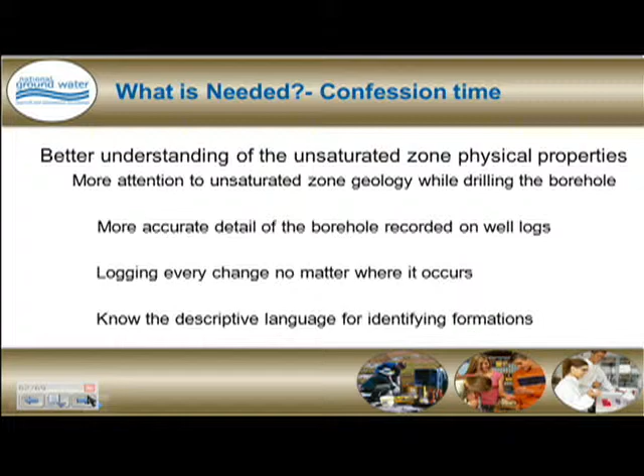So what's needed? I'm going to tell you a little story again. I told you I was a contractor for 20 years, right? Well, as a contractor, I didn't much care what was between the production zone and the surface, because I got paid when I got to the production zone. That's where the water was at, that's where the money was at. So my well logs didn't pay much detail to the surface geology.

That's exactly the wrong thing to do after looking at the results of this study. We have to pay more attention to that geology in the unsaturated zone. We have to write down everything on the well log where it occurs. We have to have the accurate descriptive language telling engineers and designers of wells what we've penetrated, and we've really got to be more meticulous every time the bit starts in the ground.

What's the best method for grouting? What's the best material? There really, folks, there's no magic bullet. There's no cookie cutter. There's no material you can say, use this every time, you'll have universal protection. There isn't such a thing. You have to match the grout composition to the on-site conditions, much like we discovered when we put a sand cement in a sand aquifer. And this will work either if you're in consolidated soils or unconsolidated soils.

All right, and there are no shortcuts. If there's any folks out there watching that drill test holes for a living, let me tell you this: you should be the highest paid person in your company. Because if you're a test hole driller and you do the test hole like it should be done, and you get the right information, and you get it right, everything else is easy. Really is. If you don't get it right, no amount of talent, no amount of engineering, no amount of makeup is going to make up for that lack of information.

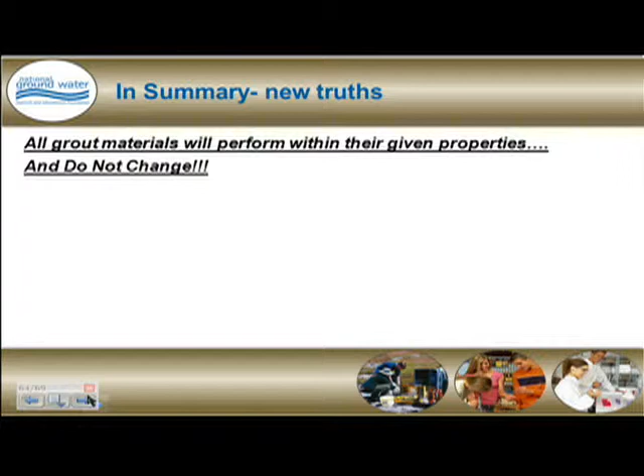All grout materials are going to perform within their given properties, and they do not change. We tried for 8 years to make a high water slurry work in situations it cannot work. We tried for 8 years to make cement not crack. I've learned there's 2 types of cement in this world: there's cement that's cracked, and there's cement that's going to crack. So remember, bentonite slurries, if they can stay wet, if they retain their water, they're going to perform. Inert solids like sands and gravels will improve that performance, but folks, if they crack, they will not rehydrate once they're damaged.

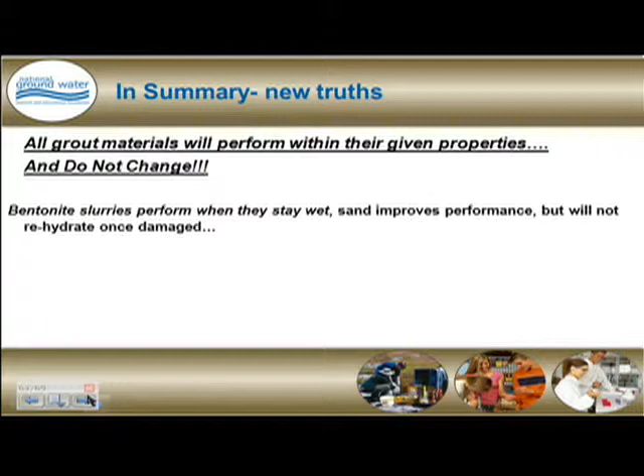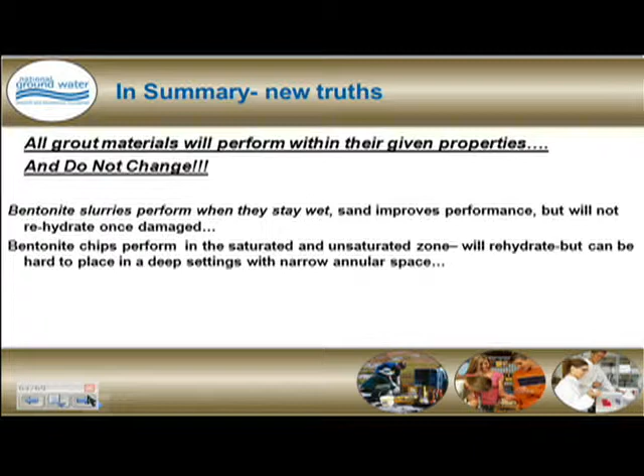Bentonite chips will rehydrate, but they can be tough to place in the borehole, and it could take a long time to make sure they get down to where they need to be. But if you get them placed, they will give you the most dynamic performance of any reactive solids we've found.

Cements will crack, but cements will give you great structural stability. They will ensure the top integrity of your well, and they have a place in the grout column. But remember, cements will not bond to PVC, so you're going to need some sort of bentonite or other dynamic seal below that.

Neat cement has the properties to intrude through chips, so lower the water content as low as you can. A sand blotter is needed when used with chips.

So where does Nebraska go from here, other than the Big Ten? That got a lot of laughs in Big 12 country, let me tell you.

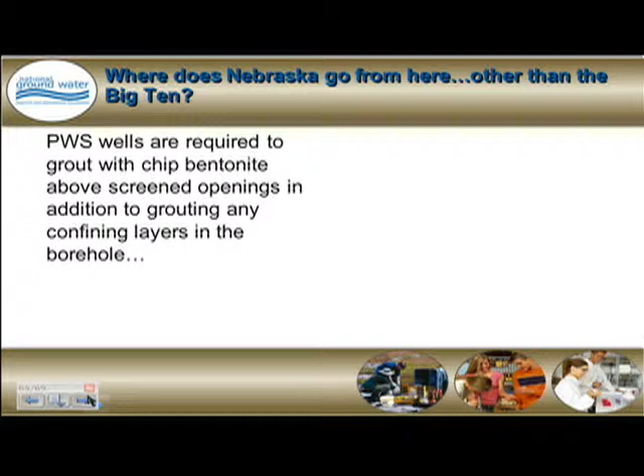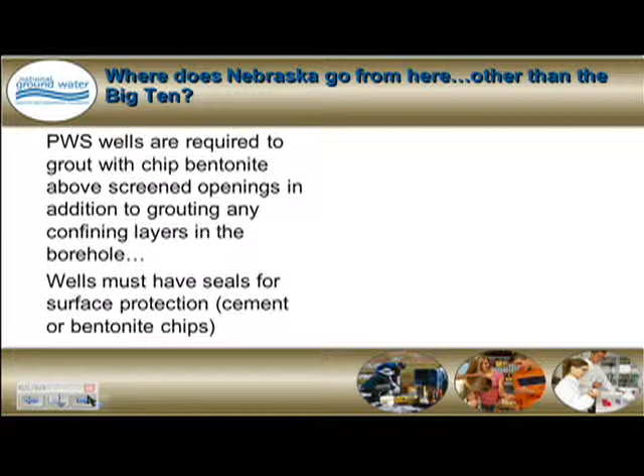Our PWS now requires bentonite chips from just above the screen openings throughout the whole borehole, and wells must have surface protection of cement or, if applicable, chips, depending on conditions. Full-length protection of a dynamic seal, we feel, is going to protect our towns, our cities, and our communities, giving them the best possible protection.

For our private systems, we are in revisions of our well standards, and we're going now with some different ideas. We're all focusing on water quality instead of water quantity.

We've always had a surface seal, but now we have an aquifer seal. We're going to put a seal down on top of the aquifer as a primary seal. The surface seal is going to be a secondary seal, and we're going to have high solids fill material in between.

We're not going to allow anything for closed loop or geo systems that don't have a high solid sand content in them -- no longer just a bentonite slurry, because we know they don't work. We're going to look at minimal screening and full-length grouting in areas of high water quality concerns.

There's one more neat little story I want to tell you about Clarks, Nebraska, that we learned. Clarks is a town in central Nebraska that gets its water out of a homogeneous aquifer -- all sands and gravels, maximum 114 feet deep. Clarks struggled with uranium in their water.

So in order to address that, Clarks went outside of town, found a site that had 0 uranium, drilled a test well, developed it, and said, wow, let's do this.

When they put out their production lines and developed the wells and put in the new city wells, the first month they had pretty good results, but slowly but surely their well started climbing up into that 120 picocuries per liter for uranium. Well, how does this happen?

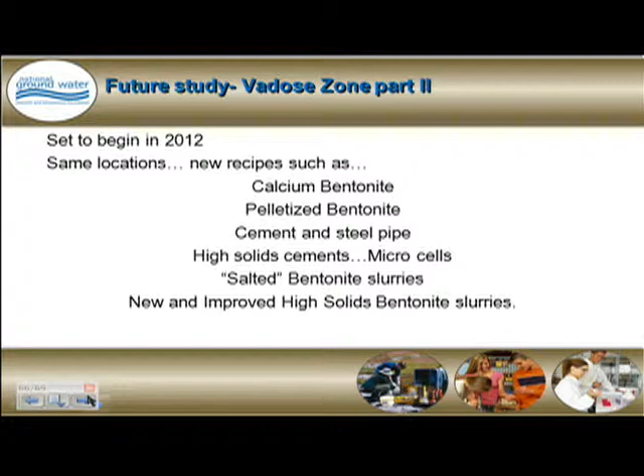The grout study is published. The University of Nebraska has it for sale at their MAPS room for about a $30 charge. The Vadose zone study is not published yet, but it will be here in the future, and any other future studies will also be published through the university.

Now I want to tell you something personally. This has been a wonderful year for me. It's gone by really quick, and I've gotten so much out of this opportunity to be a McEllhiney lecturer. I learned early, if you want to make a difference, you get involved. I'm the type of person that if I went to a meeting as a contractor and didn't like what was being said, I had the right to remain silent—I just didn't have the ability to do it. So I raised my hand, and that got me on a committee.

That committee got me involved with my local health department. That led to involvement with the state, and the state led me to be involved with the national level. And this is how a well driller from eastern Nebraska goes from drilling private wells to talking all around the world about dirt, rocks, and water. You get involved.

Because decisions are made by those who show up. It happens every time: if the people with boots-on-the-ground experience don't show up to these meetings, the planners don't have the benefit of your knowledge. If we're going to have a new focus on water quality, we've got to start with good design, coupled with good construction and a commitment from our industry to excellence. If we can do that, we're all going to have a brighter future for the groundwater industry in Nebraska and hopefully other states and countries around the world. But it all starts with you getting involved and becoming interested in how you can improve the process.